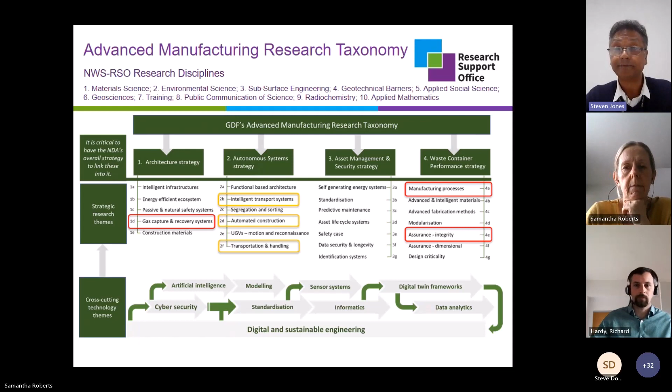Thank you, Steve. Good afternoon, everyone. As Steve says, I'm Richard Hardy. I'm a Senior Engineering Manager in the engineering team at Nuclear Waste Services. We're responsible for delivery of a geological disposal facility for the UK's higher activity waste. GDF, as we call it, is an engineered facility for disposing of higher activity waste in suitable host rocks between 200 and 1,000 metres below the surface. We're currently in the process of finding a suitable site with a willing community in line with government policy, and we're working with community partnerships as part of this process.

So in this slide, we can see just a schematic of the facility itself, which has both surface and underground areas. And in the UK, we categorise high activity waste into two broad types, and that's high heat generating waste and low heat generating waste. The high heat would be waste such as spent fuel and high level waste from reprocessing of spent fuels. The high heat generating waste for the UK inventory is lower in volume, but it has the majority of the radioactivity. And as the name suggests, the heat it generates needs to be considered in its management. And we do this by spacing out containers in disposal tunnels. And this effectively dissipates the heat into the surrounding rock. Therefore, it could take more footprint in terms of the size of the underground part of the facility. Whereas low heat generating waste, which includes materials from decommissioning and materials that have been in close proximity to the fuel, is greater in volume, it can be disposed of by stacking more closely together in disposal vaults.

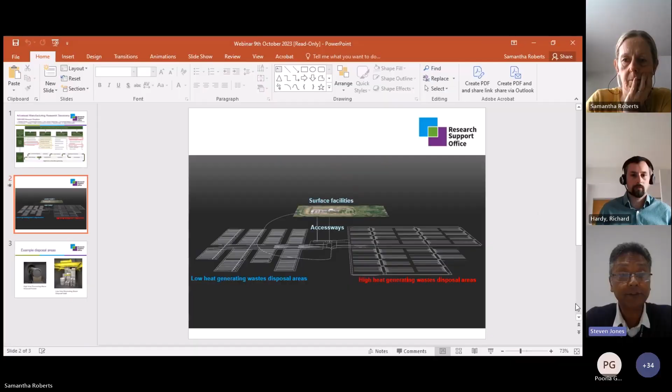Thank you, Richard. Thank you very much. So this is what we're all here to witness today and understand a little bit more. So I would like to introduce our first speaker, Dr. Steve Dodds from TWI, who will be calling upon further TWI colleagues to support this presentation due to the involvement of several engineering themes.

Dr. Dodds has recently taken up the position as TWI's Nuclear and Defence Sector Group Manager and is an active participant in a number of nuclear communities and working groups, which includes being one of our community of practice members supporting the RSO's advanced manufacturing theme and the newly formed ASME BPVC Section 3 Division 4 community looking at compliance associated with fusion energy devices. Dr. Dodds has a PhD from Sheffield Hallam University and previously researched the use of solid-state joining processes for the auto, defence and space sectors. Steve, welcome. Over to you.

Many thanks, Steve. Thanks for the opportunity to speak today. We've collected over the years quite a bit of understanding about how nuclear waste canisters might be made. And we've seen some commitment on those technologies and approaches that we've used over the years. And we'd just like to share some experiences that we've had in that topic. So in doing so, I've invited the input from a number of colleagues and then trimmed down who might present, because I realised it was quite a glut of speakers to try and get through in 40 minutes.

Please bear with us. So myself, Steve Dodds, previous life at TWI was friction stir welding, so I'm going to talk to you about friction stir welding of canisters. I was also provided information by Tim Mitchell, which is meant to say electron beam lead there, but it says B. Charles Schneider will be presenting. Now, Charles started his career in the power industry, working mainly on the development of mathematical models for ultrasonic inspection. And then since joining TWI in about '97, he's continued to develop statistical models for the reliability of non-destructive testing methods. He's led independent qualification bodies overseeing various types of inspection, including ultrasonic phased array testing procedures for the nuclear sector.

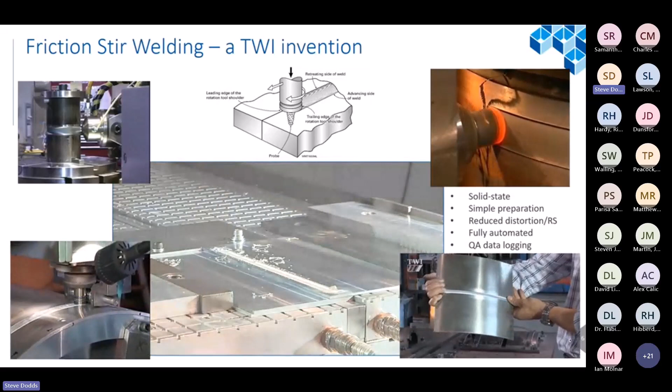Now, the reason friction stir is useful is because it is solid state, so you don't have any welding gravity effects if you were to go molten for a start. It's very simple preparation. We can work with any straight edge joint. There's no filler involved. Because we're not melting, there's much less heat energy going in, so we're reducing distortion and residual stress. Fully automated, these are all CNC G-code machines. There's no reason why you can't put a machining head in here as well and trim off the faces. And really useful for this sector, the data is logged for QA, so we can tell exactly what happened in a weld and keep a full weld history.

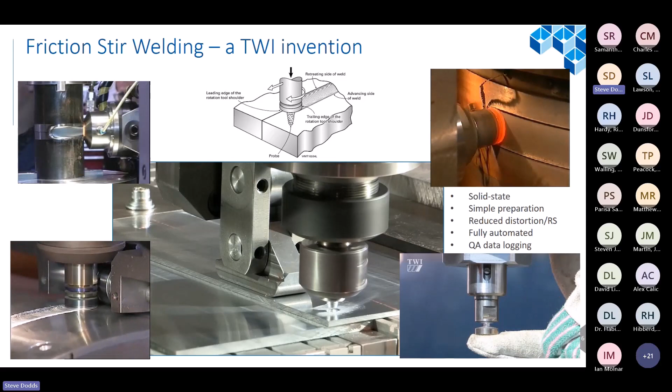But your main enemy here is obviously the conductive nature. So just a few images of some of the development that we've done, and this is over since 1993, I think we've been doing this. And there's a typical weld log as well, showing you the temperature, the torque.

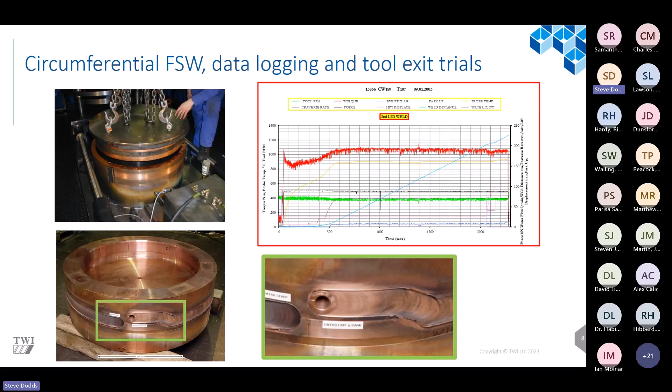And at the bottom there is a demonstrator cap that we've placed on, and you'll see that the tool, when you leave the region, leaves a depression with the displacement volume where the tool is. So the most effective way of dealing with this on this particular application is to park it away from the joint line. Other circumferential welds either pull the probe out gently to blend it in or drive it on to a wedge, which is later removed.

The SKB project is by far the most extensive that we've been involved with from scratch, and that started in 1997 on flat plate. Then the circumferential trials at TWI for 4 years, and we had a secondment as well over to Sweden. Then we helped them design, spec and buy a machine over there, and then they went on to sort of production series just to prove off the technology.

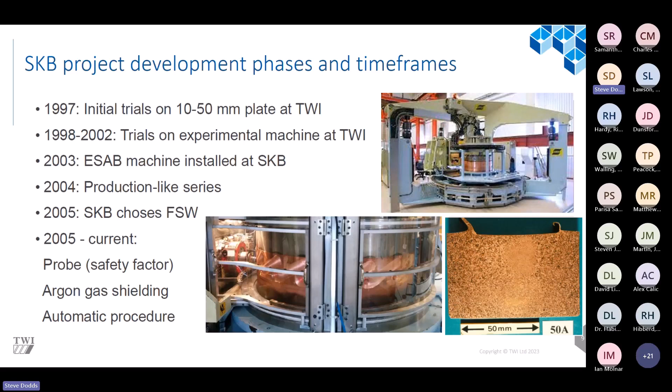And then only after all of that investment and effort did they officially choose friction stir welding as their canister manufacturing technique. So that's a long time ago, 2005, but they've been busy doing lots of other stuff now that this has been nailed down, and they're only just starting to come back to it now to get ready for actually making these things in anger.

It's worth saying that SKB have also developed some interesting technology, which is to do with the temperature probing of the tool, which is really your only useful contact point to tell you what's happening at the weld. And then we're able then to modify, using that and a combination of the machine torque, the parameters on the fly to maintain a steady temperature.

The other thing that SKB found out is they wanted to use an argon shield, not because of the weld, but to protect the tool from oxidation when it was removed. That's a very quick whistle-stop tour of friction stir welding.

Another technique that we could use here, either for the copper or for the steel elements of the canister, is electron beam welding. So electron beam welding, as some of you may know, is an autogenous welding technique with a very precise and high quality beam. And the surface finish in general is excellent. In fact, it's often used to redress joints. And it can go very thick penetration.

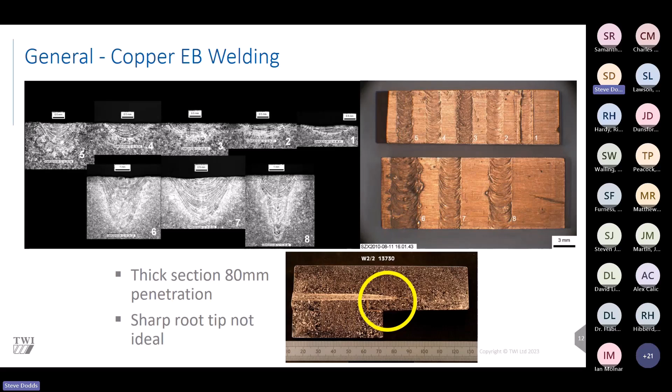However, standard EB welding can often leave quite a sharp root tip at the very bottom of the weld, which isn't great for the sort of modeling that we were looking for and the microstructural abruptness, the changes in microstructural texture that we were getting. So TWI helped develop a reduced pressure electron beam, and instead of 10 to the -4, 10 to the -6 vacuums, this is to the 0.2 millibar vacuum.

What we've effectively got here is a much more production friendly system, which allows for significantly less vacuum downtime or even local vacuum around the canister head. Also, it allows for a slightly broader beam, which can also be wobbled around. Sorry for the untechnical phrase, but that means we're able to round out the root of the electron beam weld to offer a more gradual change in microstructure around that root region.

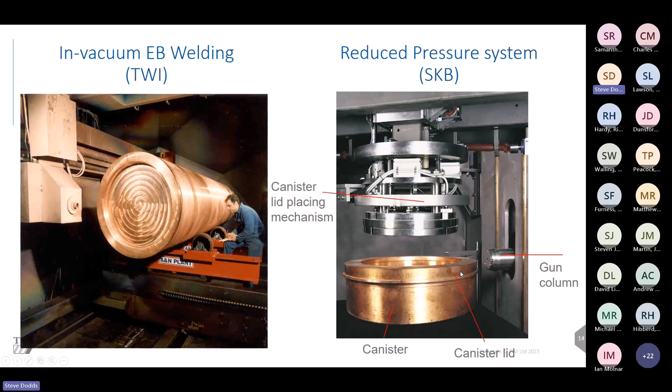There's other benefits as well mentioned at the bottom, but this was specifically targeted as a technology for canister design because of the production environment, because of the weld requirements, and because of the scale of the objects that we were welding. And here's some images of TWI starting to play with some really big stuff in the electron beam chamber. I don't know if you can see my mouse, but this is where the electron beam is emitted, and you roll the part around, and then that was then transferred over to SKB as a reduced pressure system specifically built for their trials.

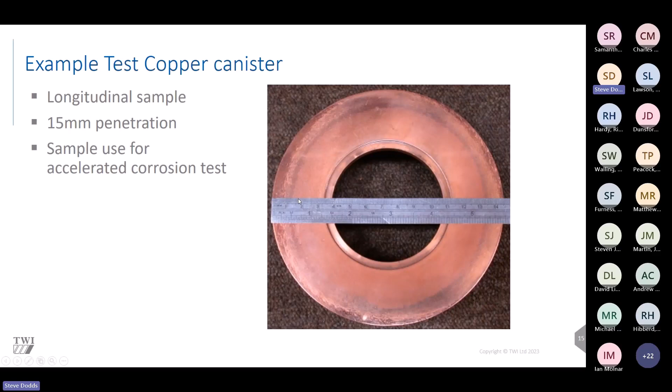Here's a section of copper canister. So you can see here a 15mm penetration, partial penetration, and that was then used for the corrosion testing that we did as well. And then finally, some big pictures again of the copper canisters, either seam welding the bent copper plates together to make tubes, or on the top there, this is a castellated sort of tooling system where we first tack weld in between the braces and then take off the tooling system and go for the full circumferential weld in one go.

So that's a very whistle-stop tour of the manufacturing technologies. Please come and have a chat with us if you want to know more. There's also quite a lot on the internet as well available.

I'll hand over now to Charles Schneider. Thank you, Charles. Thank you, Steve. I hope you can all hear me.

You've had a bit of background to me. What I'll add is I tend to be the first port of call at TWI for non-destructive testing input to structural assessment, particularly. So I work closely with our colleagues in that area, generally using BS 7910 for assessment of welds.

What I'll do in this talk is give a flavour of how we determine, or have determined, NDE requirements for canister projects and how NDE issues impact on canister design.

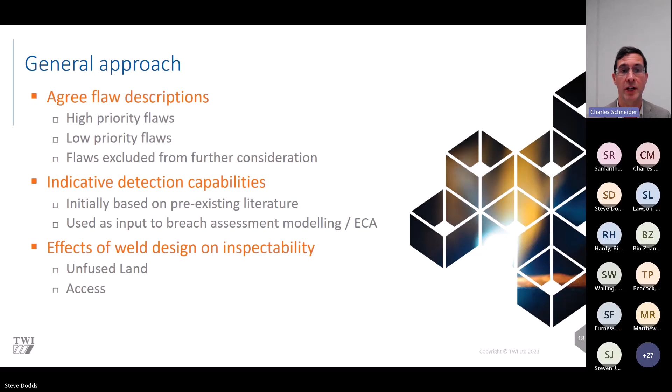And we'll consider the effects of the proposed weld design on inspectability and suggest changes where that's possible. And I'll give a couple of examples to do with unfused land and access.

So high priority flaws, by definition, need to be reliably detected and considered for inspection qualification, and they typically might be of structural concern, typically more than 3 millimeters high, but obviously that depends on the design. And we'll list those for each of the candidate processes, 2 processes here of narrow gap TIG and electron beam that Steve was talking about.

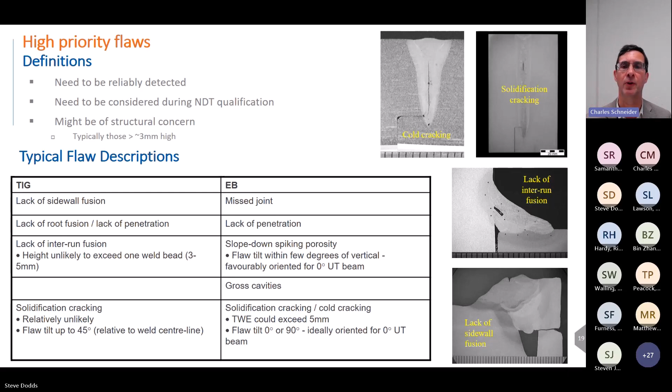I won't go through the various flaws, but this gives you an example of the first step in the process and some pictures here of typical flaws for those 2 processes. Next slide, please.

Low priority flaws. Here, detection is desirable but not essential. So that means they are considered when designing the inspection. They are considered when coming up with reporting criteria, evaluation criteria, but for instance, they may be volumetric, so they're not of immediate structural concern, so they're not necessarily included in the inspection qualification process.

Typical flaw descriptions for this are volumetric inclusions. We expect them to be easily detected, but they're unlikely to be large enough to be a structural concern. Or wormholes, again, we know they'll be readily detected because they're similar in response to a calibration reflector. Or porosity, if they're gross enough to be of structural concern, they're very likely to be detected by UT.

Okay, next slide, please. So I'm not going to go through this, but here's a case where we were considering conventional UT of ferritic welds, and we've drawn out various literature, a lot of which is included in BS 7910, and this we look at in relation to the flaw types, particularly where qualification or high reliability of detection will be needed, and we identify any gaps or issues. Next slide.

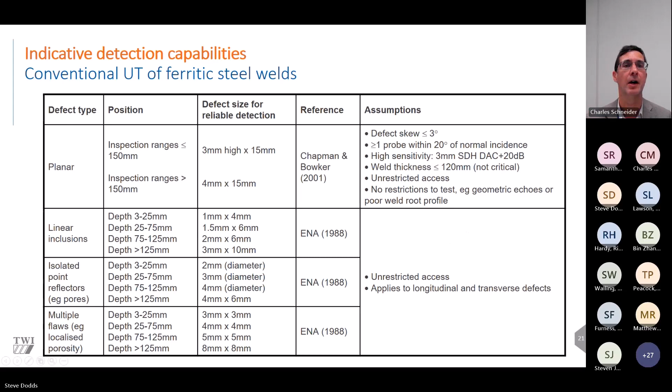Next slide. And here we have eddy current or eddy current arrays for surface flaws, and one of the things that you find here is that you've got quite a small flaw size of 1x5 if you have a machined or ground surface, whereas if it's an undressed weld cap, you probably have little advantage over ultrasonic testing. So that all feeds into the choice of preparation of the surfaces and choice of techniques. Next slide.

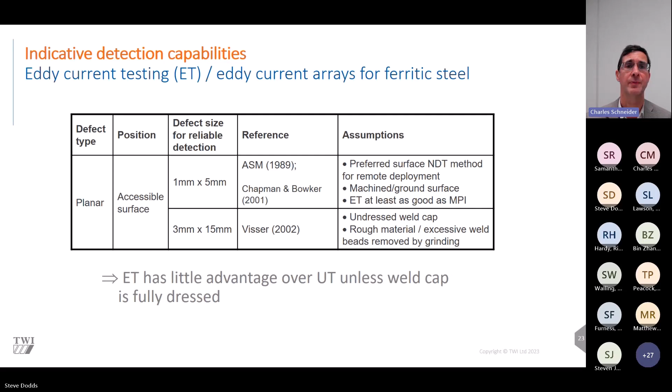And similarly for access, a lot of these canisters need lifting features for handling, but the positioning of those potentially affects the capacity of the ultrasonics to achieve high enough beam angles onto the weld centre line.

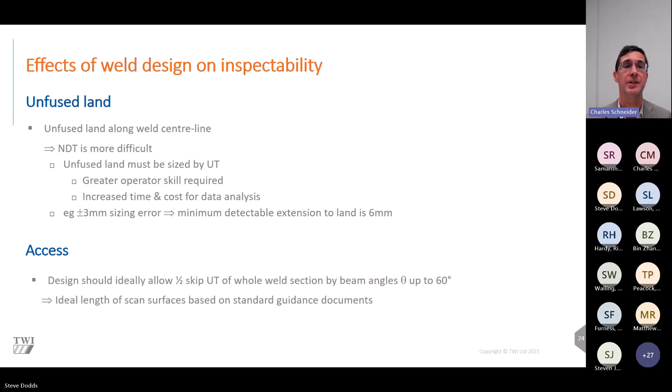So by just some fairly cautious repositioning of features, it becomes possible to get a better inspection moving forward. Next slide, please. So I'll now hand over to the people who take all of that input and use it to work out whether indeed the canister can tolerate the flaws that might potentially escape inspection.

Thank you, Charles. So Yin Jin, I'm glad you can join us, and Michael's also presenting, I think, the back end of this. You guys have got 20 minutes. Thank you. Okay, yeah, thanks, Steve, and thanks, Charles. So I have to leave in 10 minutes, so anything after that, Michael will continue. Thank you. All right. Cheers.

Okay, so within these tens of minutes, we're just going to go through what we have done to support the Swiss nuclear waste management project program. So we're looking at three main topics here: the background, where to get to where we are today, what's driving it, and then the design optimization using both fracture mechanics and FEA, and also the third element in this is the probabilistic approach to determine the distribution of breaching times of a nuclear waste canister.

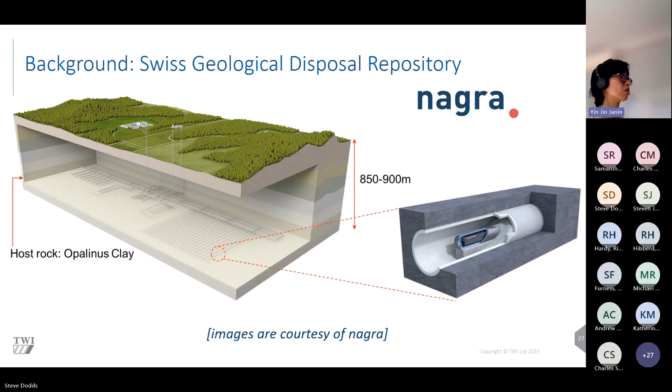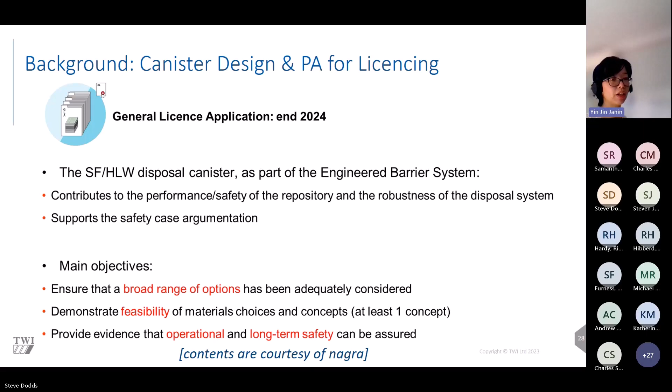So this is the Swiss geological disposal repository. So they're going to dig, go underground, with the canister buried beneath that piece of land, and then the idea is to have the license application submitted and approved by the end of next year. And obviously the main concern here is to demonstrate that we have looked at all the options in terms of designing a container to store the nuclear waste, and also look at the different concepts, and also look at how the storage condition would affect the longevity of these canisters. Next slide, please.

So we did this program to examine how the materials will perform for at least 1,000 years. But usually when we're talking about analysis, we're looking at long-term stresses. And because of the way the canister has been designed, basically we have a cylinder, and then you load the nuclear waste on it, and then you put a lid on, and it's the closure lid that is the most critical part of the whole cylinder. And so with this, we bring together the fracture mechanics principles and FEA and some support from the geologists from Switzerland to understand the conditions that this nuclear waste will face in the next hundreds and thousands of years. Next slide, please.

So one of the ways to optimize the design is using what we call a deterministic approach. By deterministic, I mean we are working with a set of known parameters or parameters estimated from models, and with that we try to establish: are we using the right welding process for the closure weld? Is EB more suitable than friction stir welding, for example, or could we go with narrow gap arc welding? And this would also affect the inspection method that the authority is going to use to determine the possible cracks that will be present in the closure weld, and also considering the long-term performance of this canister. There will be one institute that will prefer copper material, for example, but others will prefer stainless steel, and there were some that will prefer carbon steel. And the performance of all this material in the long run during the storage period has to be understood.

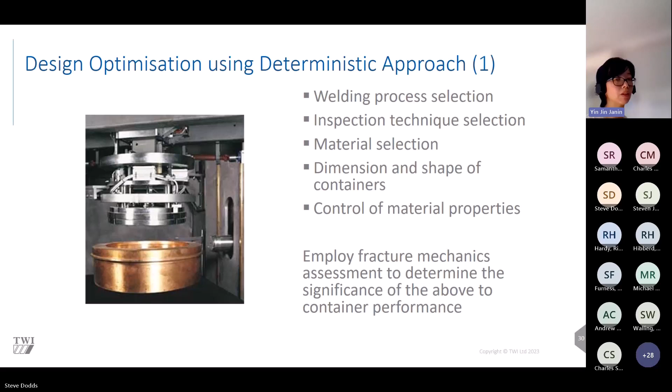And then as part of this exercise, we also look at how we can optimize the dimension and the shape of the canister, especially how the closure lid could be designed to first minimize the occurrence of defects, and to facilitate the closure weld application, and also looking at how we can control the material composition and the material properties, so that it gives us the performance that we want in the long run. So in all this analysis, we then take in the fracture mechanics calculations, and then determine which of these bits is the most significant factor. Next slide, please.

So in all the work that we've delivered to support the NAGRA program, we have employed the defect acceptance procedure described in BS 7910. So this is our BSI procedure. And then this procedure alone is not sufficient. So we've called on more sophisticated FEA analysis to look at the loading conditions and material response during both short-term and long-term storage periods. And in our work here, for the closure weld, we have decided that the EB welding process will be the most appropriate. Not just because of the marvelous production rate, the turnover of the canister, but also it can be easily automated. And with this, we look at what sort of parameters we need to achieve a sound weld, and then these parameters are fed into the welding simulation, which Michael is going to explain a bit later. And with those simulations, we predict the residual stress, and what happens if we apply post-weld heat treatment. And then all this fits in to determine the acceptance criteria in terms of flaw sizes for these canisters. And where possible, we propose, if you have the material and the funding, to then do some testing to give you confidence of the material properties. Next slide, please.

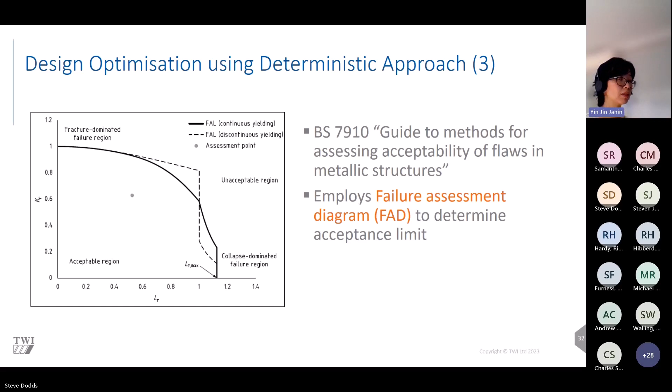From this point onwards, I'll pass over to Michael because he's our FEA expert, and I don't know what I'm talking about in terms of FEA. Over to you, Michael. Thanks, Yin Jin. Yeah, thanks, Yin Jin. You're not doing yourself justice there. But yes, this

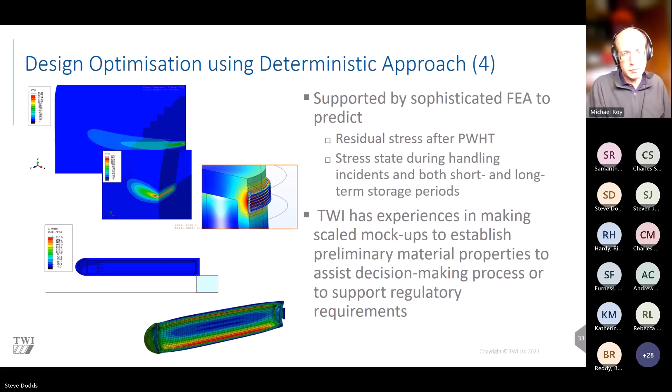Over the various projects that we've done with NAGRA, we've looked at developing these, and we've also looked potentially at doing testing to establish those. All of that is the deterministic approach to how we can calculate, for the purposes of design, and evaluate and assess the structural integrity of the canister, and how we can demonstrate, using conservative assessments and conservative inputs, that it's safe for the duration that's required.

But actually, everyone here knows that some of those parameters are uncertain. We can make a conservative assumption, but we don't necessarily know what the right value is. Some of them are inherently variable. For example, the distribution of defects is variable. And some of them evolve over time. So Steve, if you want to go to the next slide, please.

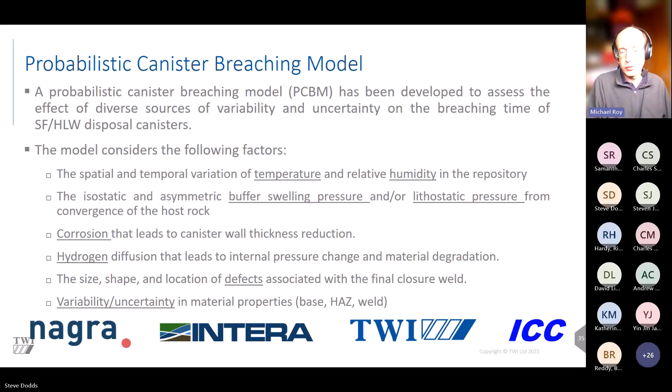Based on all of that, we can put all that together, and we've developed this probabilistic model. The terminology here, a realization, is a calculation for one set of input parameters evaluated over time to give a prediction for how long, based on that set of parameters, it would be before the canister could no longer be considered to have acceptable structural integrity.

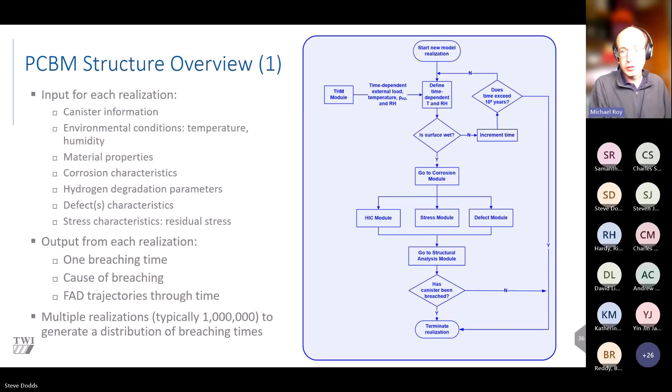And the program will sample all the distributions of possible inputs. You can see them listed there. It then runs the calculations that you can see on the right, which account for hydrogen ingress, structural stresses, defect positions, corrosion, and makes a calculation of the structural integrity based on that for the particular set of inputs that it's sampled. If we move to the next slide, it's a bit easier to see, please.

Okay, but now if we move to the next slide, what happens if we run that a large number of times, say 1 million times, for the sake of argument? We sample the inputs 1 million times, we run the calculation 1 million times, and we generate 1 million breach times. That gives us a distribution based on the distributions of the inputs. That gives us a distribution of the possible breach times. You can see that the top graph is showing, this is obviously example output, it's idealized, there's no numbers here, but we might get, for example, a distribution of probability of occurrence of a particular breach time for spent fuel canisters, and we might get a different distribution for high-level waste canisters.

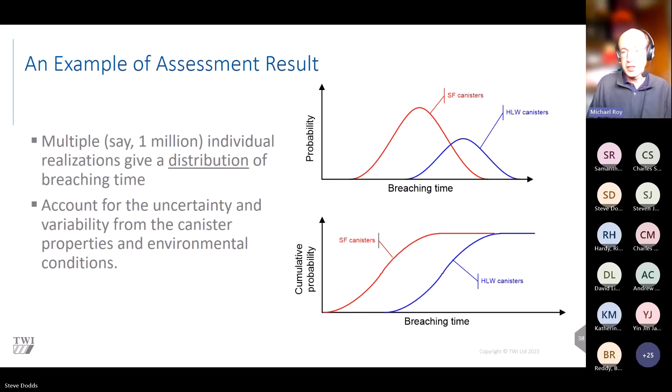So for both of those, that's the probabilistic assessment. Earlier we had the deterministic assessment that we can use for design. And we've been putting both of those together with the welding technology that you saw earlier, with the NDT that you presented earlier. We can put all of that together to build a safety case for the integrity of the canister for a particular design. That brings me to the last slide and the end of the presentation. So I think I'll hand back to Steve at this point. Thank you.

Many thanks to Michael, Yin-Jin and Charles. Astoundingly, we have 3 minutes left on my clock, which went better than planned. And thanks, Steve, for the opportunity to present this. We went for breadth rather than depth. I hope everybody didn't mind the skipping over of stuff that's quite interesting, but we're always receptive to your phone calls and emails to talk about it.

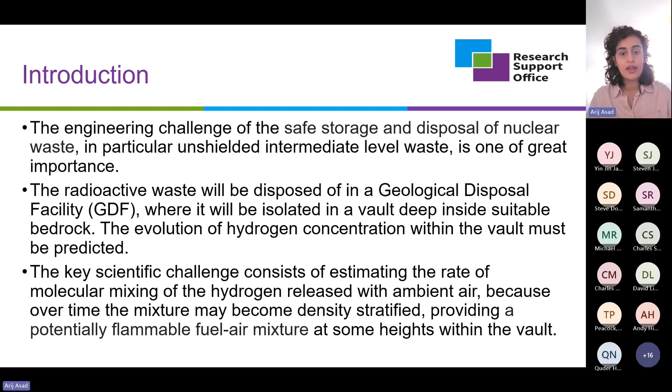So the key scientific challenge consists of estimating the rate of molecular mixing of the hydrogen released with ambient air, because over time the mixture may become density stratified, providing a potentially flammable fuel-air mixture at some height within the vault. So an important step towards addressing this risk is to make validated predictions of how a less dense fluid discharging into a more dense fluid modifies the conditions within the vault.

So in a series of experiments, which I'll present in this talk, the density is controlled by salt as a solute in water, and this approach enables a scaled representation of the buoyancy of hydrogen gas discharging from nuclear waste packages into air. So I'll look at two cases, the case where there's no ventilating cross-flow and the case where there is a ventilating cross-flow. I'll also present an analytical model for the case where there's no ventilating cross-flow, and also I'll present just the results from my experiments for all the cases.

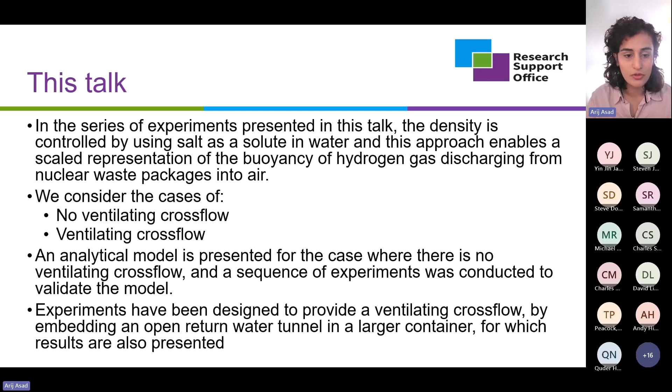So just a quick overview of the experimental setup. The experimental setup consists of a rectangular tank of dimensions 800 by 400 by 450 millimeters, with a video camera that's recording the flow as it comes out of an orifice that's contained within a smaller pipe within the tank. I'll show an image of the setup on the next slide, but just a quick overview.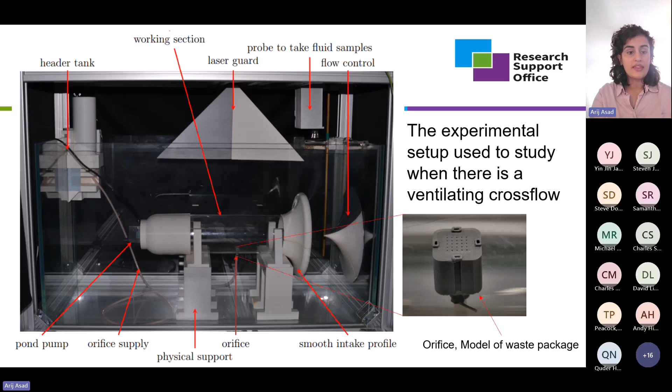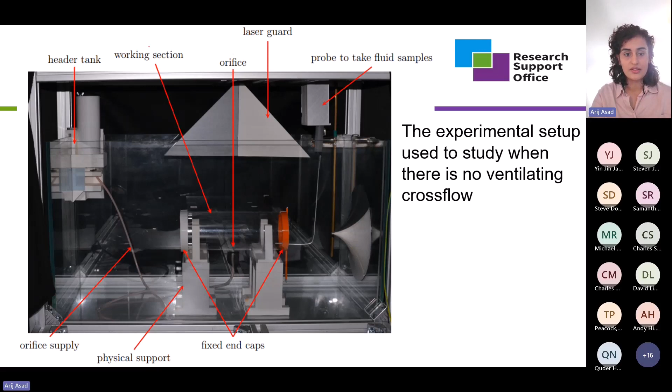And this orifice over here can be changed. So I've used a range of orifice sizes, which were quite easily fabricated using a 3D printer. And the achieved changes in pressure gradient allow the injection rate to be varied. So essentially this is the setup that's used to investigate when there is a ventilating crossflow, and then I have an almost identical setup on the next slide for when there's no ventilating crossflow, and the only difference is there's fixed caps on the end in this case.

And then also, apologies for the messy graphs. It's just the way that it's been plotted with the program that I had. We can see that as time passes, demonstrated by the black arrow, the stratification becomes sharper. The passage of time is measured by the colour saturation of the lines, where darker colours indicate later times. And we can see that d rho by dz, the rate of change of density with respect to height, is maximal for the 4 millimeter case, as the dye layer thickness is greatest, since the flow rate is higher for the largest nozzle size.

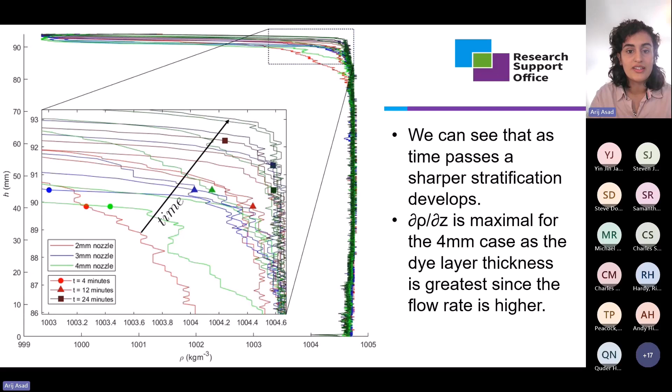And then I also have the density plotted against height for this case too. We can also see for this case, as time passes, sharper stratification also develops, and d rho by dz is maximal for the 4 millimeter case as well. Same thing, and there is an anomaly in the data for this case. We're hoping once we do some repeats and rerun these experiments, that won't happen again. Still unsure as to what was the cause of that.

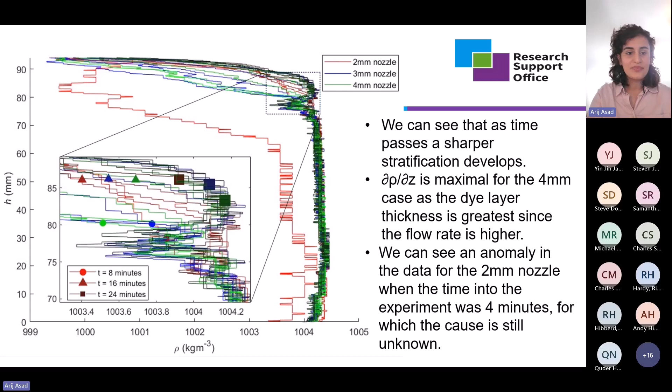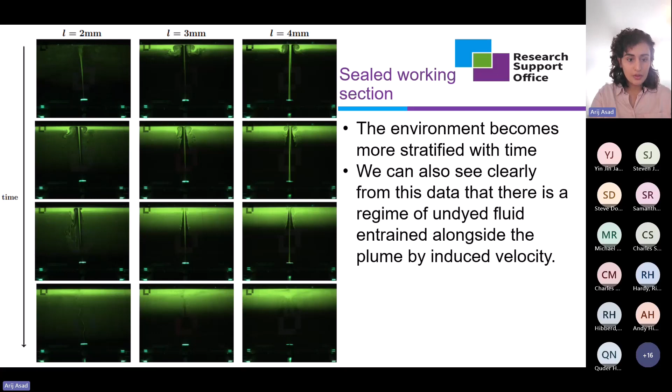For this case, I did look into coming up with an analytical model. We can see that the stratification that evolves with time in the closed case is the most marginal for explosion risk because of the buildup of hydrogen. Therefore, I'm going to present an analytical model using a diffusion equation with a moving boundary. Phi in this case is a scaled version of the density. The reason I've done that is just to make it a bit easier to solve.

So these are the boundary conditions. At time equals 0, the moving boundary is at the top of the tank, it hasn't quite moved down yet, so that's going to be 0 at the start of the experiment. Phi of 0, t is the value of phi at the top, and that would probably be the same as fresh water. And then along the moving boundary, it will probably be the density of salt water just underneath. So that's how I've scaled it.

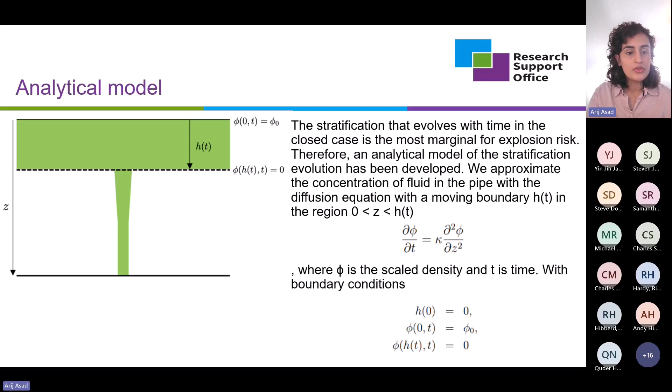So when you solve these equations, I get this solution for phi, and then I've scaled this back up to get to the actual density values that we want, where ρs and ρf are densities of saltwater and freshwater respectively, and lambda appears up here, where it's just a constant that I've used to make the equation look a bit nicer. So this is what I plot.

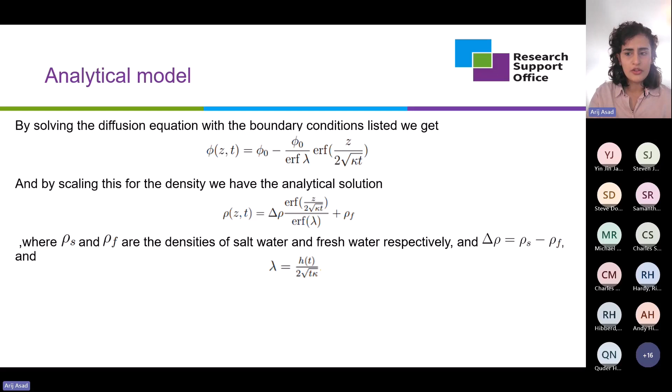However, I don't have a value for kappa, so I've made a few mathematical assumptions and come up with something for that. By using Prandtl's mixing length hypothesis, where kappa is equal to gamma times u times L, where u is the velocity scale and L is the length scale, and taking the velocity scale to be given by a dynamic balance between buoyancy and inertia, I come out with this equation, which I simply rearrange for kappa by making a few more assumptions.

And then by taking this value for kappa, I plug it into the equation in the previous slide for lambda, and I can come up with a scaling for how the height varies with time, which is t to the 2/5. So just to test some of these equations that I've come up with, I did some plots and compared them to the experimental results.

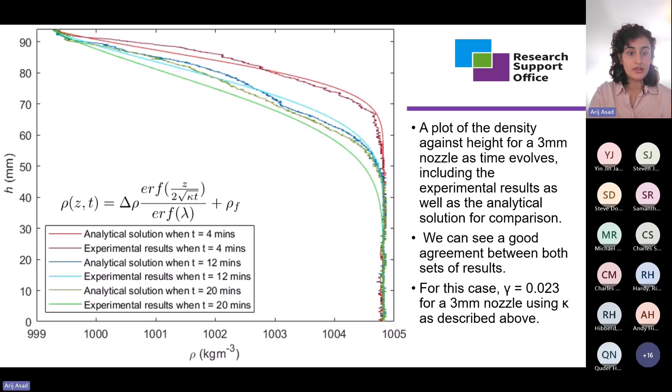So what I have is a plot of density against height for a 3mm nozzle as time evolves. We can see that the smooth curves are the analytical solution and the more jagged lines are the experimental results, and we can see that we have quite good agreement for the two. For this case, gamma is equal to 0.023 for a 3mm nozzle. I thought that was quite good agreement for this error function solution, and then did the same thing with the 4mm nozzle and also got good agreement for gamma equal to 0.0075.

I also tested how the height varies with time, where h was this moving boundary height. The smooth curve is the analytical solution, and the dotted lines are the experimental results, and we can see we have some good agreement. Towards the end, the experimental results do seem to plateau, but this can probably be put down to the fact that the header tank ran out of fluid. But yeah, so got some good agreement there.

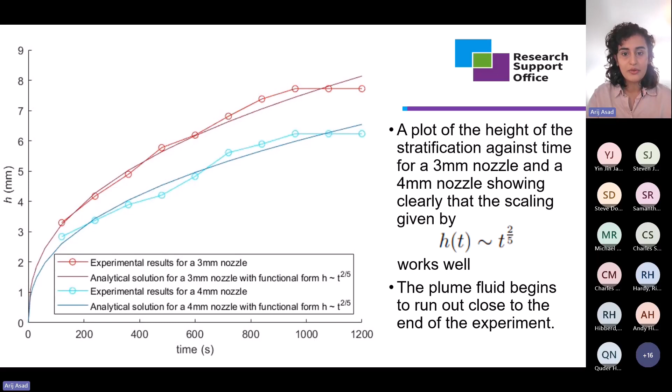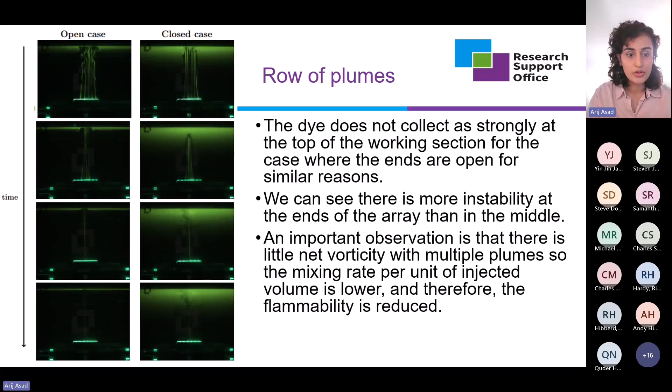We can also see evidence of necking. But that was quite an interesting case, which I'm going to look at in more detail, hopefully soon. Obviously there's always room for improvement. The next steps would be to improve the quality of results, so to get a more powerful programmable laser and coordinate this laser with the camera, so the laser pulses while the camera's triggered. Having the laser pulse delivers more power than just having it continuously switched on, like I've had in this set of experiments. So this will probably result in greater contrast between dye and water, which will give better images.

And then for future work, there's also a lot to be said. For the study of the interaction of multiple plumes, the header tank volume was far too low. It needs to be greater, because the flow rate being used was too high and the experiment ran out quite quickly. We can model the closed-end experiments by, rather than using this small working section in the tank, using the entire tank instead, which would also be easier to model, because modeling a circular pipe is more difficult than a cuboid shape, which gives easier differential equations to solve.

And since in the end application, the leakage of hydrogen would most likely occur over long time scales, it would probably be useful to have much longer timescale experiments. The experiments I ran for this set probably ran out in 25 to 30 minutes, which is nowhere near how long we're expecting this leakage of hydrogen to occur over. So we'll probably take advantage of the programmability of the laser and camera and make some automated measurements, rather than having me sat in the lab the whole time watching what's going on.

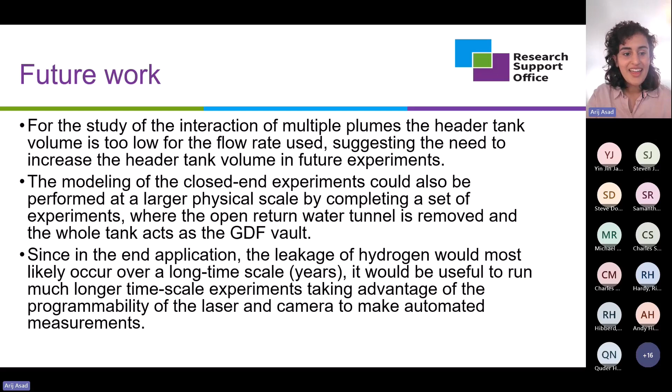Thank you, Arij. The passion and the speed at which you know your subject is quite phenomenal, and we need more people like yourself to take up that challenge. So thank you very much. I'm sure we'll have some questions. I certainly can see a benefit of this capability within my particular area, but there's so many opportunities elsewhere that you're working on. So thank you.

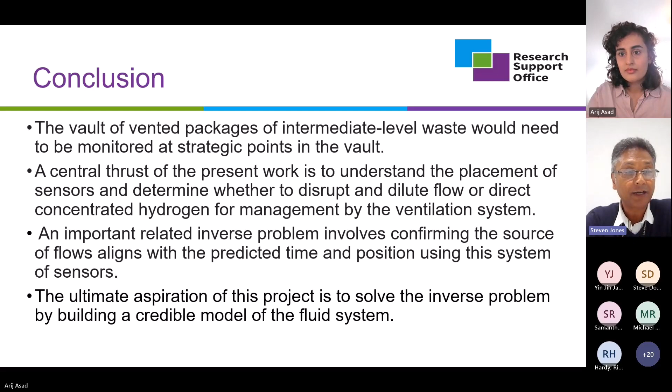I'm conscious of time, so I'm going to take the advantage now of introducing our final speaker today, which is Matthew Riding. Matthew is a third-year PhD student within the Future Innovation in Non-Destructive Evaluation Centre for doctoral training based at the University of Strathclyde. His research project is focused on developing new ultrasonic inspection techniques for use in challenging environments, such as those encountered in nuclear fission and fusion power plants, where some of his work is also in collaboration with the United Kingdom Atomic Energy Authority. So Matthew, very interesting when I saw you up in Strathclyde early in the year, and really pleased that you've taken the time to come and talk to us about this. So Matthew, over to you.

Thank you very much, Steve. Yes, thank you very much for inviting me to talk here today. Just start sharing my screen. Okay, I hope everyone can see that just fine. If there's any issues, just let me know. I will start. So yes, thanks again for inviting me to talk here today. I've really enjoyed the other presentations so far. I'll be talking about laser ultrasonic inspection for nuclear applications. And I'll give thanks in advance to all of my colleagues from my laboratory for their support in this work.

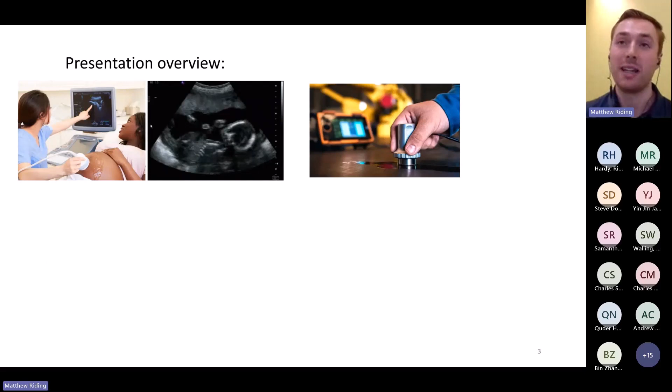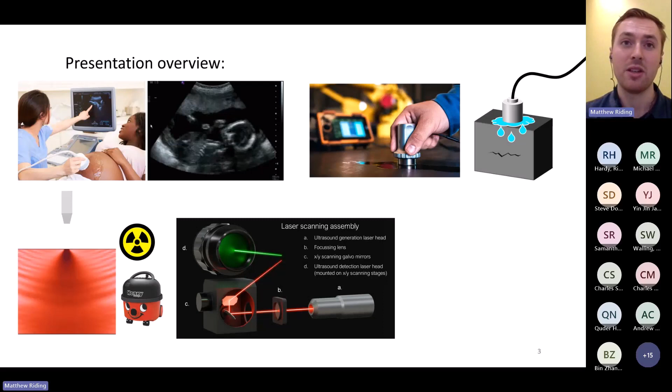So to give you a bit of an overview of the presentation today, I first just want to anchor this in something that everyone will hopefully be familiar with regard to ultrasonic inspection. I'll give the classic example from medicine. I then want to introduce the idea that ultrasonic inspection is also widely used in industry and to evaluate the health of engineering structures, and that this is mostly done using piezoelectric transducers, which are also very familiar from the medical field, which couple to samples with a sticky gel. I'd then like to introduce laser-induced ultrasonic inspection as an alternative form of ultrasound transduction, and show how it is potentially more widely applicable in challenging environments when compared against the piezoelectric transducers. The laser scanning assembly that we have at the University of Strathclyde and which I work on, and then I'll present some case studies of work that we've done with relevance to nuclear applications.

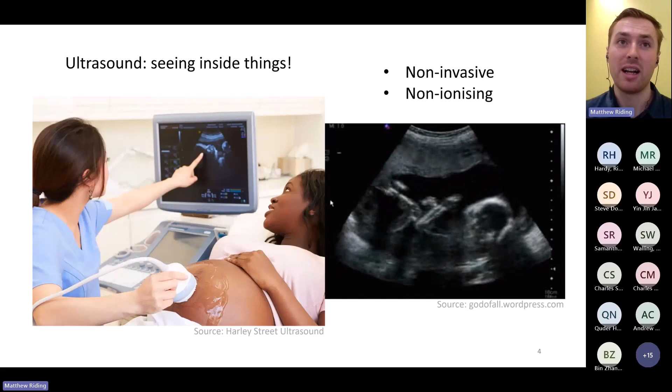So using ultrasound is all about seeing inside things, and seeing inside things without having to invasively cut them open to see the features that are invisible from the exterior. And so the classic example is in obstetrics for antenatal screening. It's a non-invasive technique, and it's also non-ionizing, and that's why it's really widely used in medicine, especially at these sensitive applications, and it's really useful there. I'll point out couplant at this stage. This is going to be a bit of a theme of my talk, sticky gel that's needed to couple these traditional piezoelectric probes onto their targets for contact-based ultrasonic inspection.

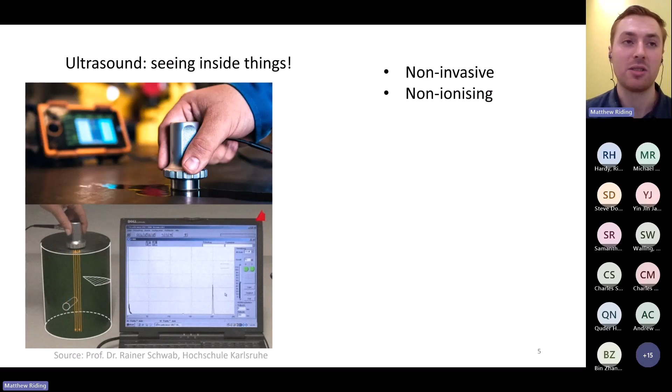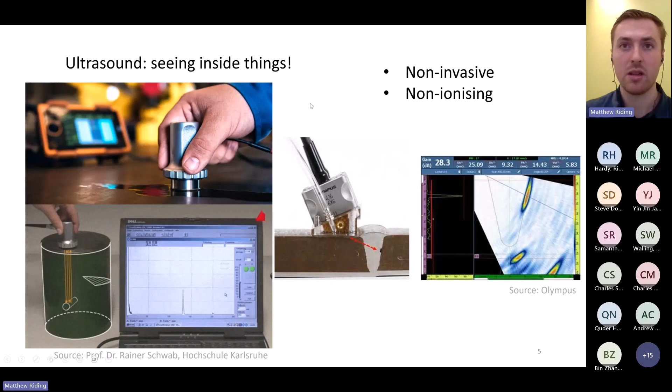So for the same reasons, ultrasound is very useful in industrial applications for examining engineering structures, solid structures, for defects. You can see in this animation a probe being used to detect the presence of an otherwise invisible reflector buried within a block of metal. And the echo from that reflection is appearing on a sort of graph readout of time of flight of the ultrasonic waves. In some more advanced applications, ultrasound can be used for imaging, and so we have imaging algorithms that we can use to process ultrasonic time of flight data into spatial images. Couplant, again, ubiquitous in all of these pictures, so it's being used to couple piezoelectric probes to their targets.

So nuclear applications have some really challenging requirements. One that I'm particularly passionate about and that I've been exploring in my work is application to nuclear fusion. A future fusion reactor presents a radioactive environment, an ultra-high vacuum environment, depending on the specific components that are under inspection, and other really exotic parameters such as high magnetic fields.

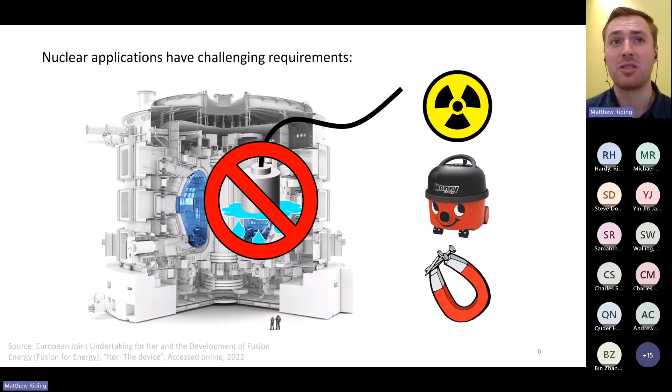And these make it challenging to deploy many existing non-destructive evaluation methods for the inspection of these types of reactors, including piezoelectric ultrasonic transducers. They will not be welcome inside the ultra-high vacuum environment of a tokamak.

As a hopefully more relevant example to the theme of today, this diagram I've taken from a publication on waste immobilization and the manufacturing processes that go into that. And again, we're seeing radioactivity, elevated temperatures in this application, the desire in general not to come into physical contact with the inspection targets, and also maybe a vacuum. We've heard presentations about electron beam welding today, which is a vacuum manufacturing technique. And so an in-parallel in-process inspection would have to be compatible with that. And so again, we're seeing examples where these gel-covered piezoelectric transducers are not going to be welcome.

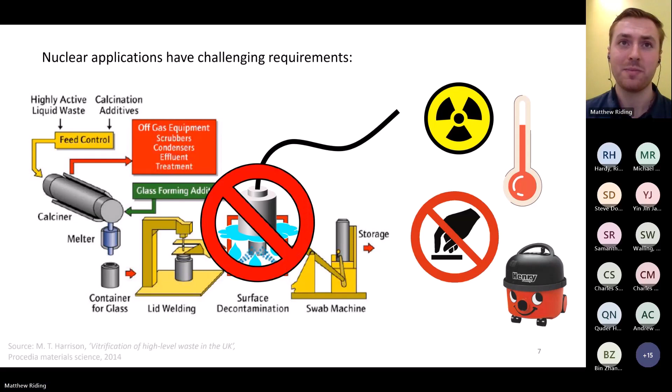So this brings me on to introducing the idea of laser ultrasonic inspection. When you use laser ultrasound, you can induce an ultrasonic pulse through a short pulsed laser that rapidly heats the surface of a sample. The rapid heating generates rapid expansion of the near surface material, and that expansion is accompanied by the emission of acoustic waves downwards into the bulk of the sample. These propagate and reflect off acoustic discontinuities such as cracks.

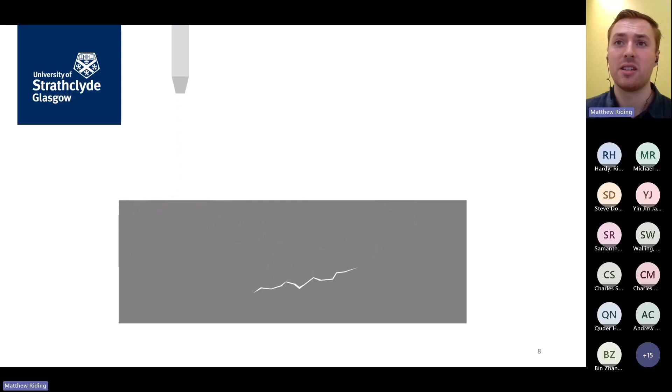We can then use a second laser system to detect the arrival of those echoes back up to the surface of the sample. This will output a plot of surface displacement over time, also known as an ultrasonic A-scan, and collects data that looks very similar to the piezoelectric transducers. So by this means, we have now an all-optical, non-contact ultrasonic transduction technique.

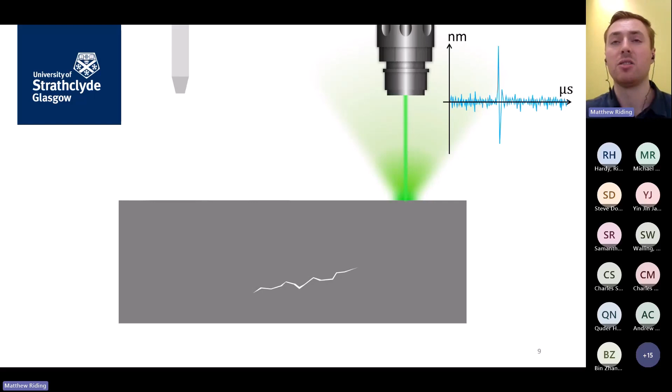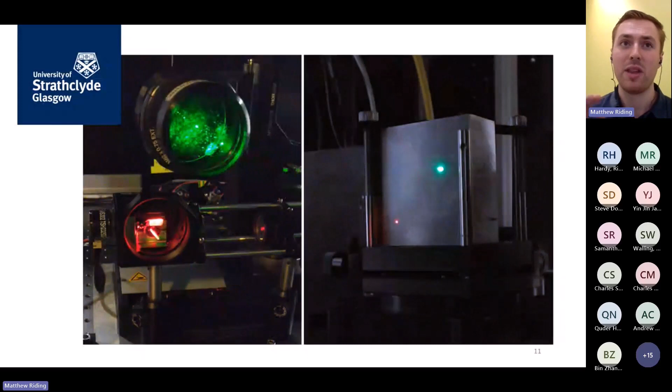So this brings me on to the idea of phased array imaging using laser-induced ultrasound. Using our assembly, we can position and scan our lasers over the surface of a sample and capture A-scans in a process known as full matrix capture. This is to synthesize a phased array in post-processing. We apply a standard ultrasonic imaging algorithm known as the total focusing method, and that allows us to generate ultrasonic images of the subsurface reflectors inside our samples.

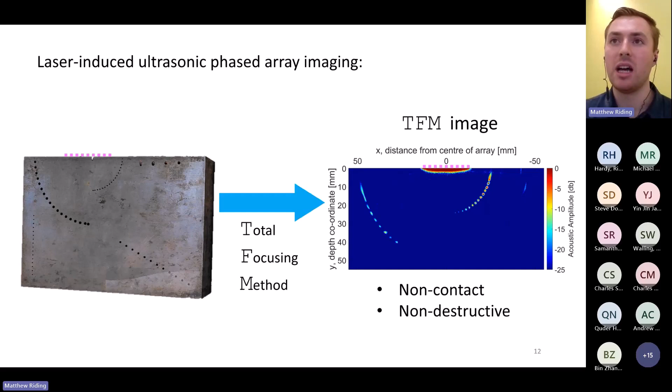It's a non-contact, non-destructive ultrasonic transduction scheme. It requires no couplant, it's just shining the lasers onto the surface of the sample. Let's point out in this case that the array is much smaller than the imaging domain, so we can take advantage of the outward propagation of ultrasonic waves to image a wide domain from a small array aperture.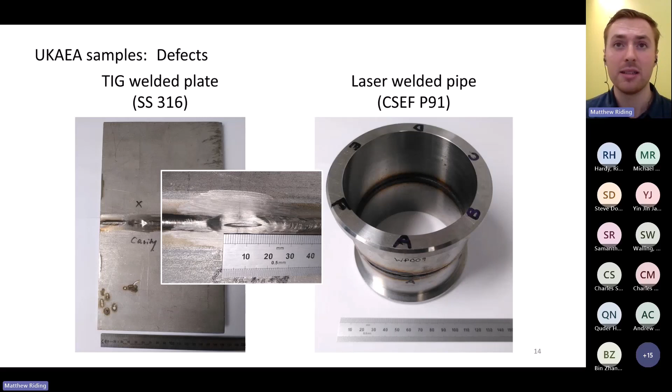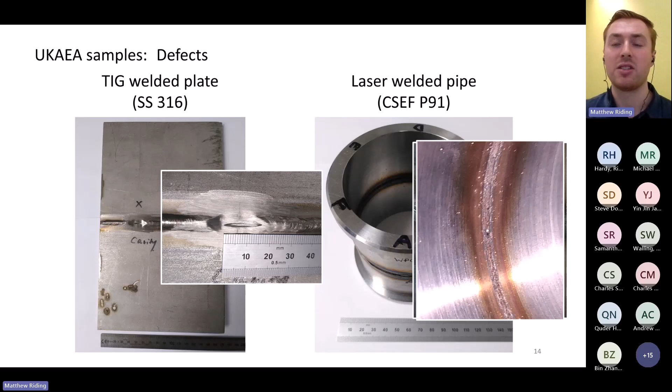And both of these samples contain defects. The plate has an artificial defect in the root of the weld, and the pipe contains a naturally formed sort of keyhole type defect at the end of the laser welding process. So we went hunting for those defects and tried to demonstrate a detection of both in these samples.

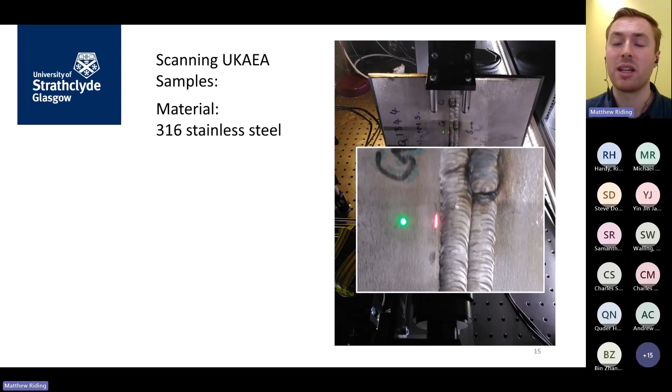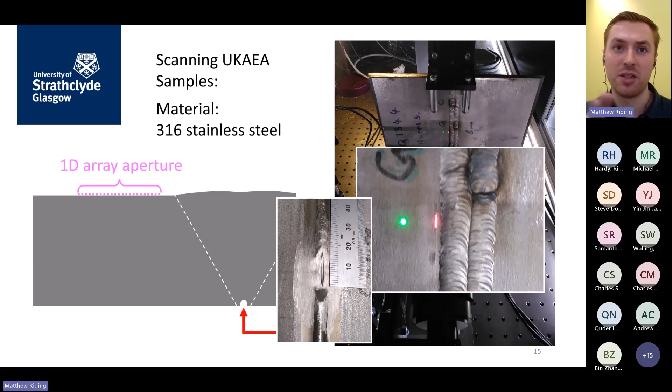So here's the plate mounted in our laboratory with the lasers illuminated on the surface. It's a stainless steel plate, austenitic. We formed a phased array to the left side of the uneven cap. We're working on going straight onto the cap, because that's something that the lasers can do potentially better than the transducers. But for now, just to make a nice comparison against the transducers, we're doing a phased array to the side of the cap. So looking at a cross section, we build an aperture up to one side of the cap, and then we're targeting the root defect, which is down there out of aperture at 12 millimeters depth, and with the following small dimensions.

Those are the scan parameters. The limitation of the technique at the moment is the time that it takes to capture the signals, but we know that there are built-in bottlenecks in our setup. It's not currently been optimized for speed, and so that's the major priority of our ongoing work.

So here are some TFM images, and we're able to see the defect very clearly, which is a really exciting result for us. This, at the time, was one of the thickest samples we've examined in terms of the distance of the defect from the surface. So down at 12 millimeters depth, so it's a decently thick plate.

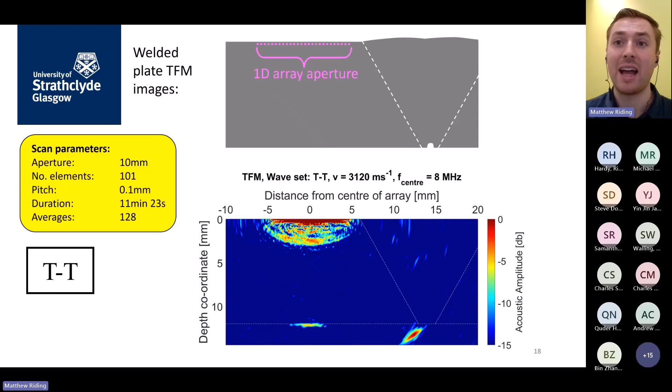We're able to see it with different views. So this is a self-tandem imaging mode, where we're able to see the defect at a nice upright orientation. And with different wave modes. Laser ultrasound is a highly multimodal ultrasonic source, and so we generate all of these images from the single data set, from a single scan. So you get lots of different views of the defect.

It was good to see that when we moved further down the weld to a nominally defect-free area, those indications at the root of the weld all disappeared, and so that's nice evidence that we were genuinely detecting the presence of the defect.

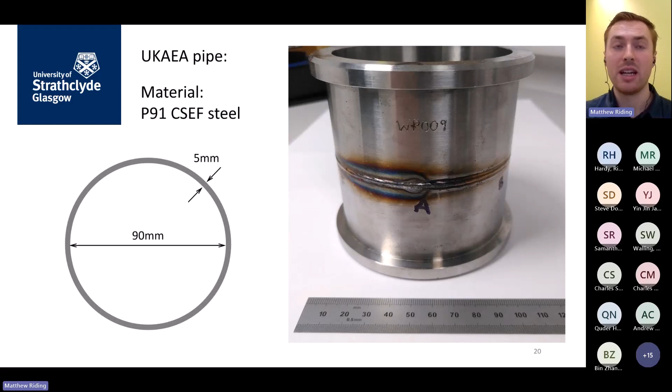Moving on to the pipe now. This is a slightly different material, a martensitic sort of nuclear grade steel, 90 millimeter bore with a 5 mil wall thickness, significantly thinner than the plate. It had a flat prep laser weld inside it, with a width of about 2.5 millimeters on both the inside and outside. It was welded from the inside using a bespoke laser welding tool at the UKAEA.

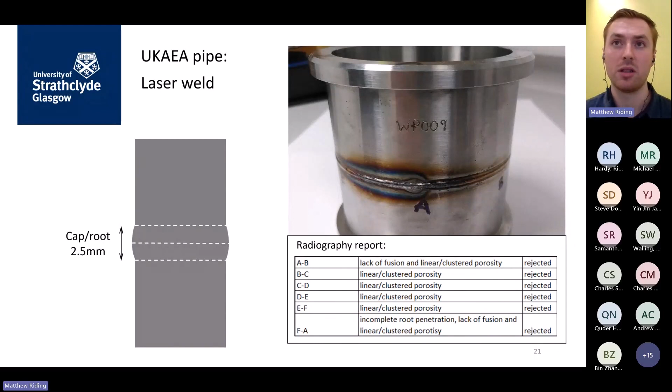And the defect we went looking for was this keyhole defect that's visible from the inner surface, and came up as incomplete root penetration on this radiography report. So that would form something like this in the cross section of the weld, a sort of inward pore on the inner surface of the weld.

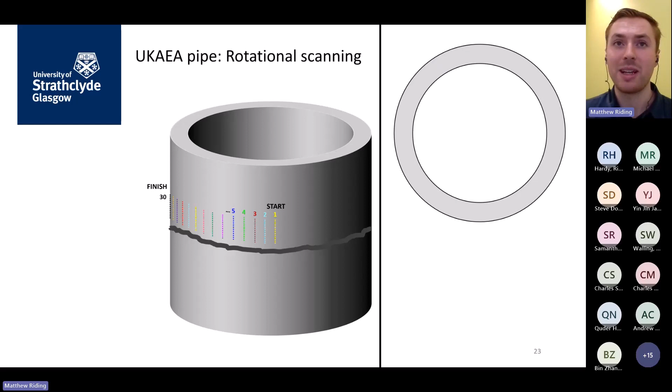In terms of scan strategy, at this time we actually captured a series of images. So we started at one position on the surface, the outside surface of the pipe, and then took a second array image at a next location, and then took a whole series of images covering a 90-degree sector of the sample. Just to be clear on the laser configurations there, we've got the lasers coming in from the side stacked above each other, and then focusing on this 90-degree sector.

And if we started at 0 and moved to 90, I manually positioned the defect, which I can see on the inner surface, at approximately 60 degrees into the scan, to give us something to look out for. We kept the lasers fixed, rotated the pipe on a rotation stand to complete the scan.

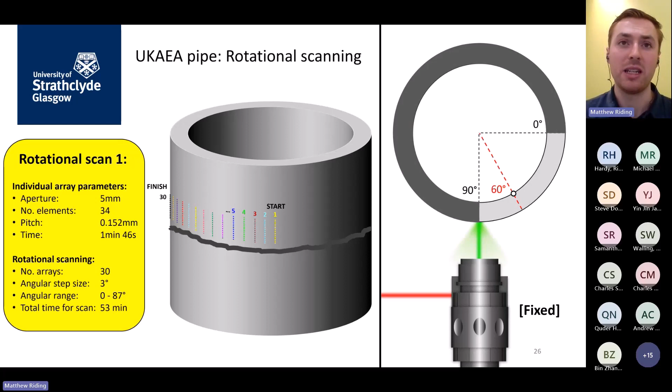There are the scan parameters, a much smaller aperture for this one, and each individual capture was quite quick, just less than 2 minutes, but the overall scan time for completing this 90-degree sector was almost 1 hour. So again, speed is a real drawback at this stage, but it's not been optimized for speed, so that's the priority of our future work.

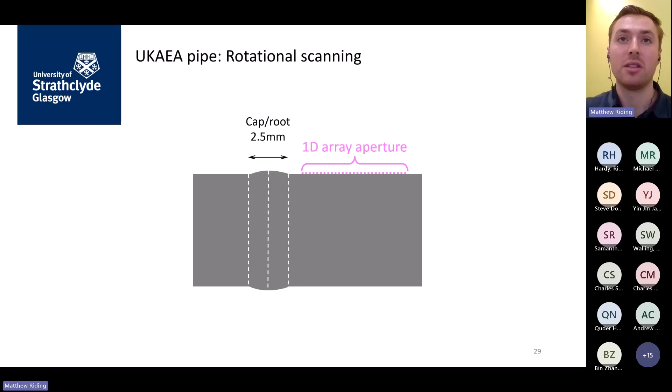So we're forming an aperture to one side again of the weld cap on the outside. We're looking for a defect down at the weld root. So I'm going to present all of the images we've captured stacked into a 3D volume in the top left, and then it's going to step through each image individually, highlighting with the magenta plane, and it will display that corresponding image in the top right. The bottom plot is a slice through the 3D volume at the depth of the back wall. There's one outstanding indication, and I hope it will be clear to you when I play the animation.

There we go. The angle is plotted in the title of the image in the top right. And we've got this very strong indication at the backwall depth for an angle in that scan going from 0 to 90 of 57 degrees, and I was aiming for 60, so I clearly have a 3-degree positioning error in my hands. But we're pretty pleased that we've been able to detect it and that it's so clear.

The whole 3D volume is normalized to the amplitude of the defect, so it's really outstanding compared to all the signals captured across the scan.

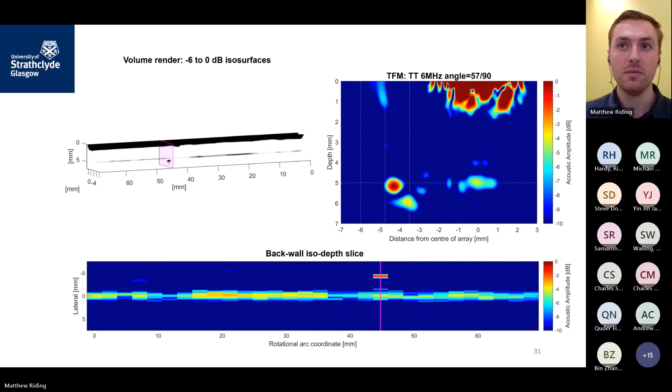There's a signal to noise ratio for the indication. And then we can likewise render multiple views using different wave modes, taking advantage of the highly multimodal nature of laser ultrasound. And again, we're seeing a very clear indication here of the defect at the same angle.

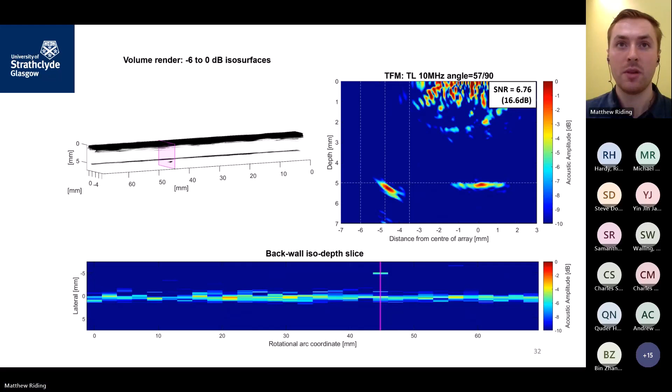So just to finish up, one final application that I mentioned earlier and which I've been pursuing in my work is the in situ inspection of plasma-facing components in tokamak reactors. Now, these are very high vacuum environments, and you don't want to start coming in here with a gel-coupled probe and smearing liquids all over the walls that'll take ages for them to decontaminate. So this is a potential environment where laser ultrasound could be very helpful.

The idea would be to deploy the laser ultrasound inside the vacuum vessel via a robotic manipulator or maybe a wall-mounted system as well, and go and inspect the armored tiles that cover the inside of these reactors. The material that's really relevant to this is tungsten. This is the prime candidate material for future power plants, mostly selected for its high melting temperature and thermal properties

and resistance to sputtering. And so I'm very pleased to have been able to demonstrate with the tungsten sample I borrowed that we were able to image the tips of these slots in this artificially defective tungsten bar, which is really exciting. And we're continuing this work to look hopefully at further samples relevant to these components.

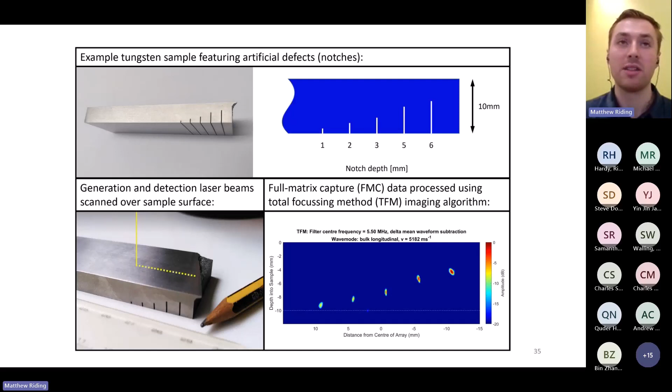Thank you, Matthew. Once again, like Arij, so passionate about your subject, and I've been very lucky to witness the activity firsthand whilst visiting you last February. I just want to sum up before we go to the question and answers session, but I just want to thank all our presenters, Steve Dodds, Charles Schneider, Yin Jin, Michael Roy, Arij Asad and Matthew Riding for giving us

this fascinating presentation. And I'm sure all of those who are still with us can see the fact that there are opportunities from other sectors and there are opportunities that will be created by the GDS research programs into other sectors. So this is a win-win opportunity for all that are involved with this program. I can see the presentations are obviously going to be used for many forums in the future. And I think what we see here is the potential for the advanced manufacturing community to be inundated with a wealth of information that could possibly be used to explore future research themes in the future.